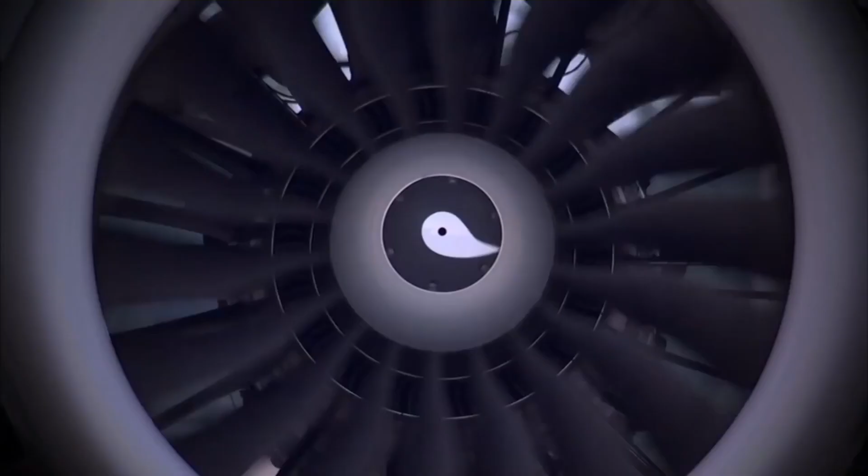Aircraft of today are quieter, more efficient and stronger than anyone could have imagined, even a few short years ago. Of course, future aircraft will continue this trend and become even more efficient and dependable, reaching unimaginable goals that today's aircraft could never reach.

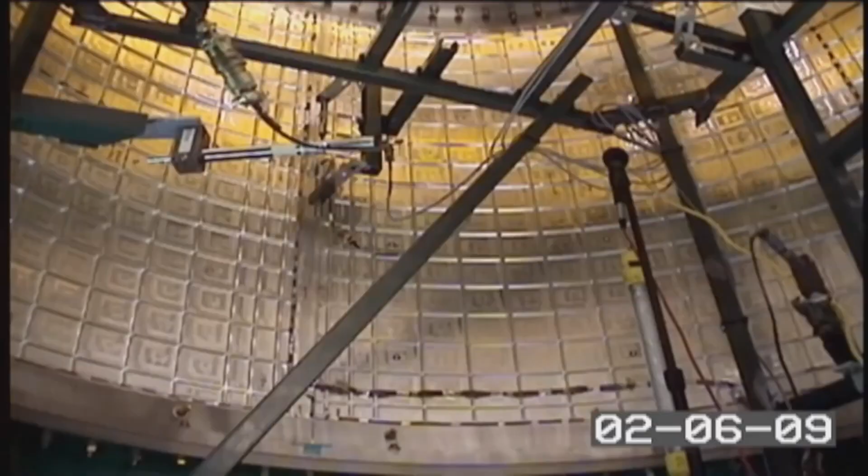But how will they reach these goals, and who is performing the important work to change the way we all fly? The common misconception is that most advances come strictly from major aircraft manufacturers. But the true story is much more complex. Unknown to most of the public is that one of the unsung leaders in aviation is NASA. NASA engineers work hand in hand with industry partners, developing and testing new designs to make aircraft safer, greener,

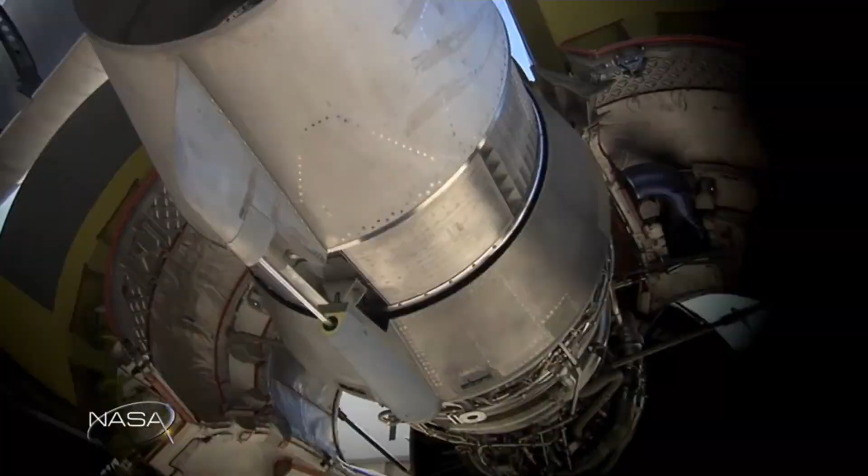and much more efficient. On this episode of NASA X, we will look at how this collaboration works, and we'll see how NASA and industry are paving the way for greener, safer aircraft for today and for aircraft of the future as well.

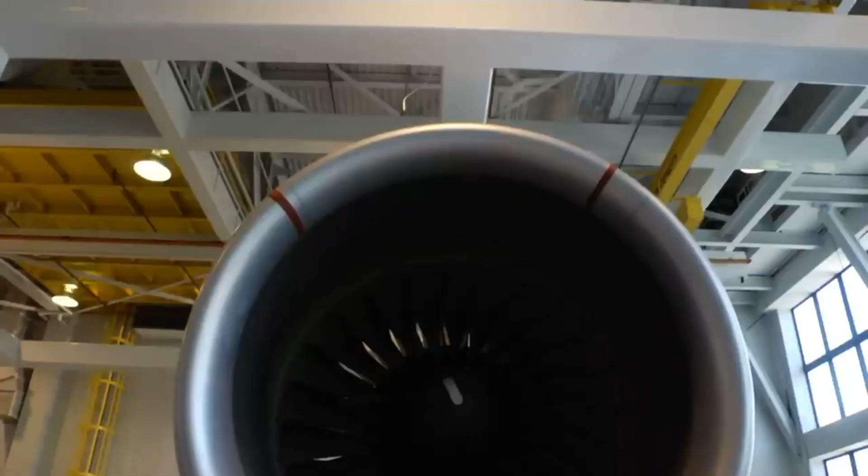This is a familiar sight for modern travellers. Large metal jets roaring down the runway and lifting into the air. In fact, this sight really hasn't changed that much in the last 50 years or so. Other than the way most people dressed for flights back then, the basic concept of air travel is pretty much the same. There have, of course, been measurable differences in fuel economy, with new developments in engine design and noise reduction techniques. But the basic tube and wing shape and the material used to build these aircraft has remained pretty much the same for years.

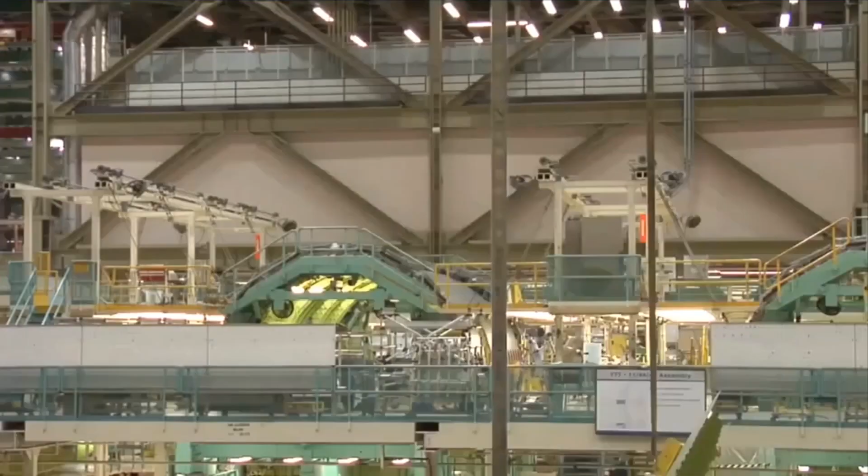But that isn't the case anymore. Like so many products that have evolved dramatically in the last few decades, like phones for example, the same is true for aircraft design. Today more than ever, researchers are pushing the boundaries of the science of flight in their effort to make aircraft of the future more efficient, quieter and greener.

So who's taking the lead and why? Obviously industry is taking the lead in some areas, because cleaner operations and more efficiency mean higher profits. But they're just not the only players. One of the leading innovators in aeronautics over the history of flight has been and continues to be NASA.

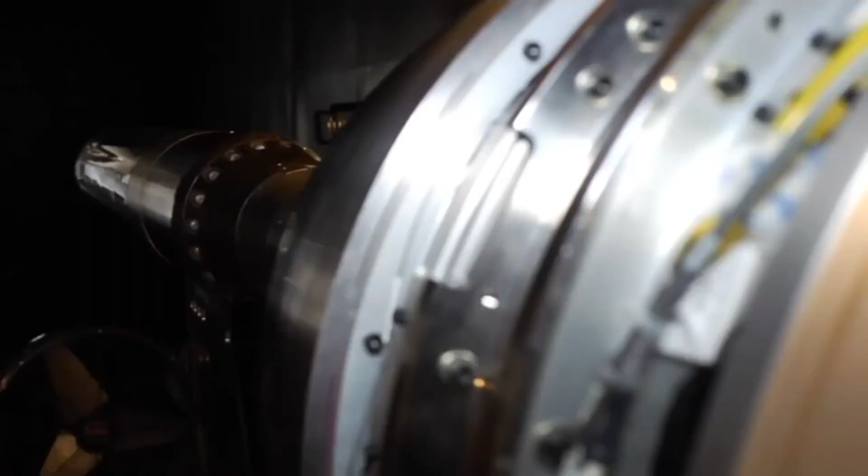The push to modernise and change aircraft of the future is being led by NASA's Environmentally Responsible Aviation Project, or ERA. The ERA project is putting its money where its mouth is with tough but reachable goals to make big changes in how we fly by the year 2025.

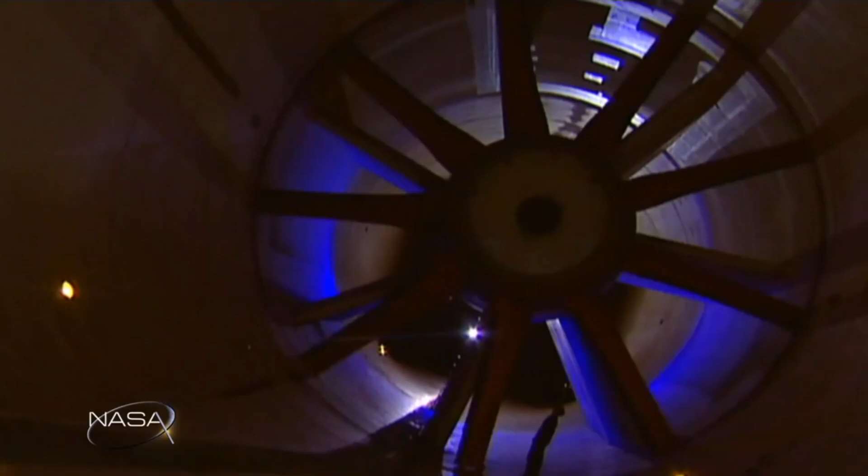So the Environmentally Responsible Aviation Project is a 5-year, 6-year project, and it's focused on advanced aircraft design and the technologies that are needed to enable them. The main goal of the project is to reduce noise, to reduce mission fuel burn, and to reduce LTO NOx emissions. And LTO stands for landing takeoff oxides of nitrogen emissions.

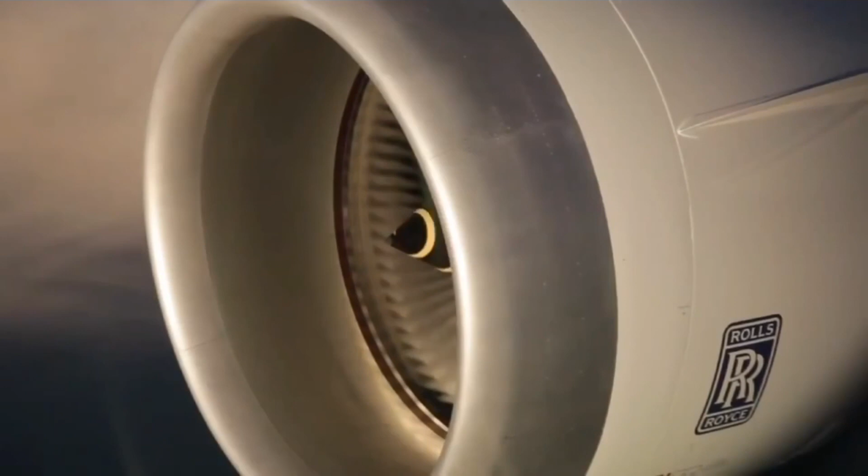And we want to do that simultaneously, and that's never been done before, where we looked at some very difficult metrics and tried to push all of those metrics down simultaneously. And so over this 5 or 6 years, we'll be looking at technologies, we'll be looking at aircraft designs and the combination of those to end up with a configuration that could simultaneously attack these goals.

So how do you make these goals a reality? The 4 basic principles of flight are lift, drag, weight and thrust. Finding efficiency in each of these basic principles will help reach NASA's stated goals. Let's look at weight first. Obviously, if you can reduce the weight of an aircraft, then you will burn less fuel and therefore become more efficient. Airlines are always looking for ways to carry less weight.

You can see that in extra baggage fees, reduction of heavy items such as ovens and heavy carts on some planes, and in one of the most drastic measures taken in recent years, some airlines have begun asking passengers to use the bathroom in the terminal before getting on the plane, making the passengers a little lighter.

In a 1-month experiment, an airline found that they reduced greenhouse gas by 5 tons simply by asking passengers to use the loo ahead of time. This proves that even small changes in the weight of an aircraft can add up to big long-term benefits. The holy grail, of course, is to make the entire aircraft structure lighter.

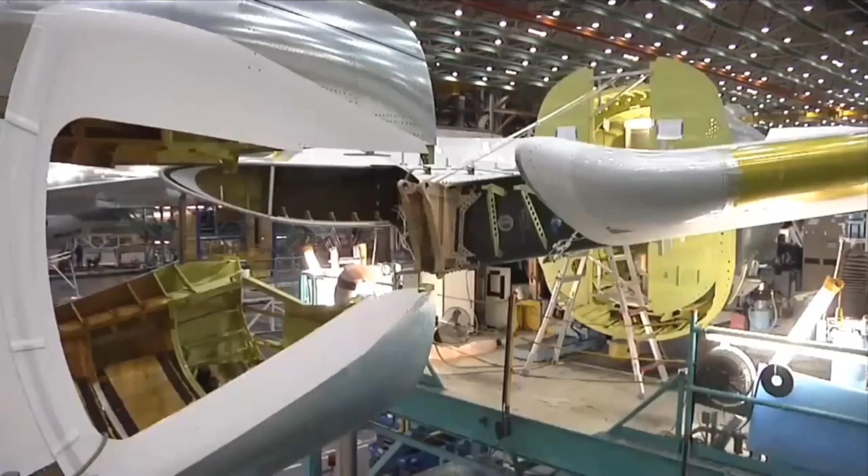So how can this be done? Today's aircraft are made out of metals that are safe, but that are also very heavy. So is there an alternative? In recent decades, NASA and its industry partners have been working hard developing new materials that could bring aircraft out of the 20th century and into the future.

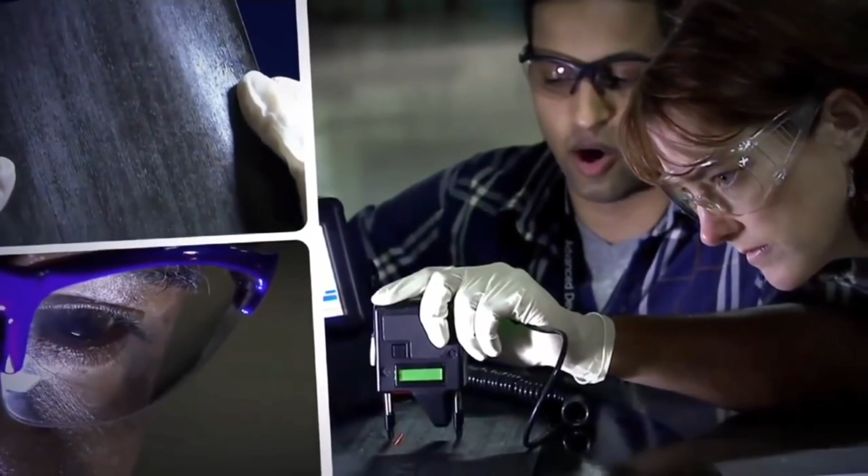New composite materials are leading the charge to replace conventional metals. Aircraft designers are taking advantage of composite materials' lightweight, strength, and flexibility. Aircraft designers have long known about these qualities and have been using something called carbon epoxy composite materials in small quantities for decades.

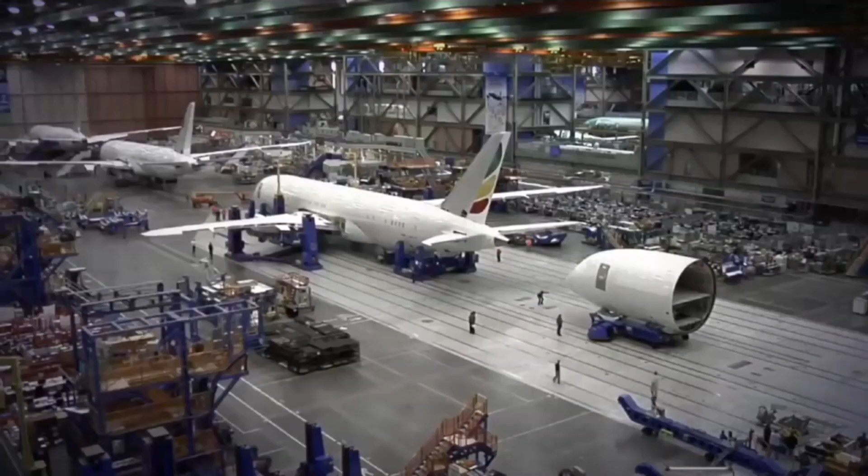After years of research and validation of composites for flight, the Boeing company was the first to step up and build an aircraft almost completely out of composite materials. Called the 787, this next-generation aircraft first came into service in October of 2011. As the first official commercial flight of the 787 took off from Tokyo that year, it was clear that this concept of an all-composite aircraft was here to stay.

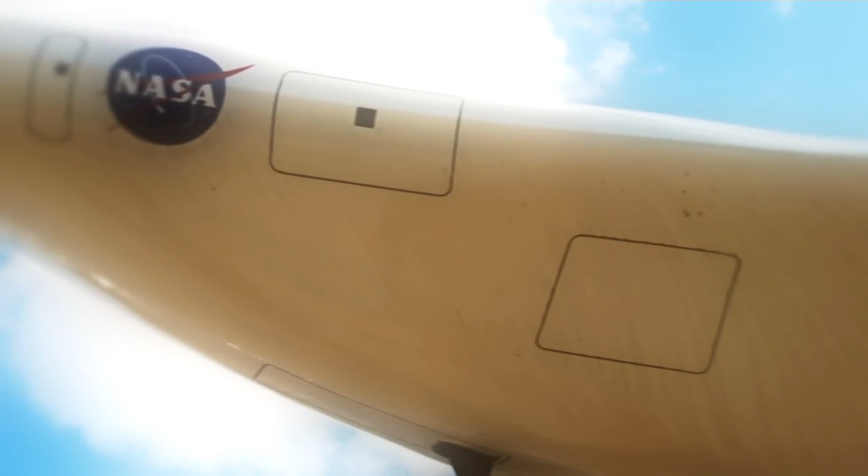NASA is not in the business of building aircraft, but they are in the business of helping lead development programs to move the science of flight along. Once validation and testing in the development process is complete, NASA shares its findings with industry in an attempt to help further research and development.

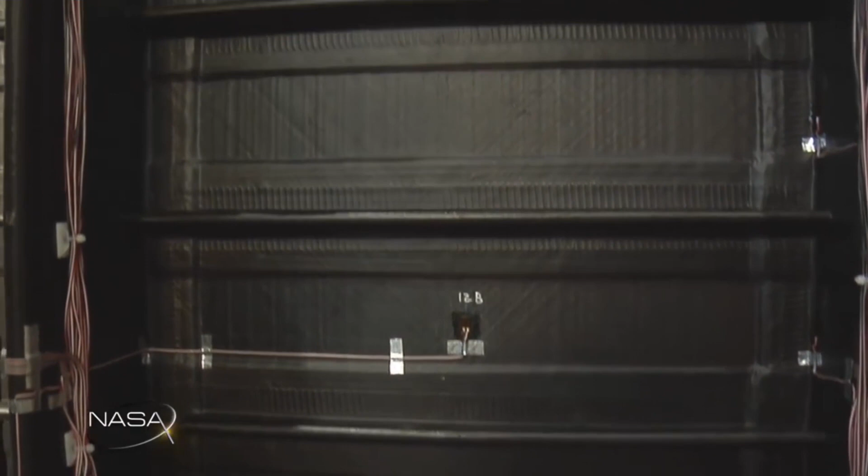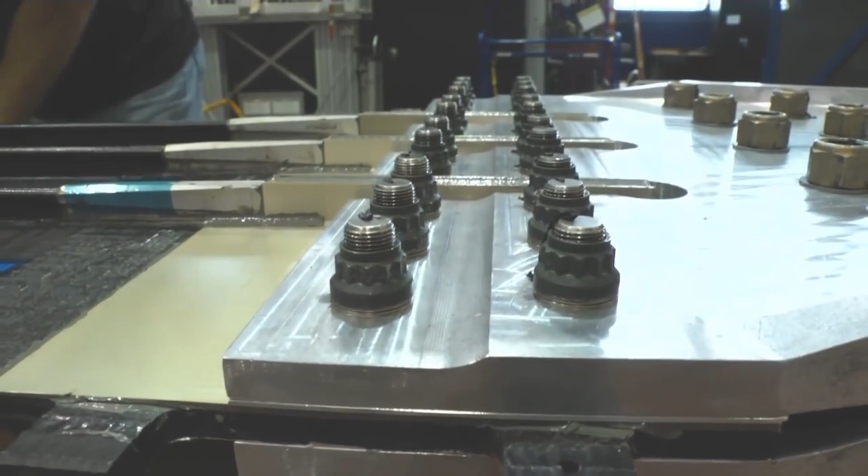One of the programs in which NASA is working with industry is in the development of new composite materials for aircraft. Here, in the Structures and Materials Lab in Building 1148 at NASA Langley Research Center, much of the development of next-generation composites for use in aircraft is taking shape. Called PRSEUS, this new idea has the potential to completely rewrite how composites for use in aircraft are made.

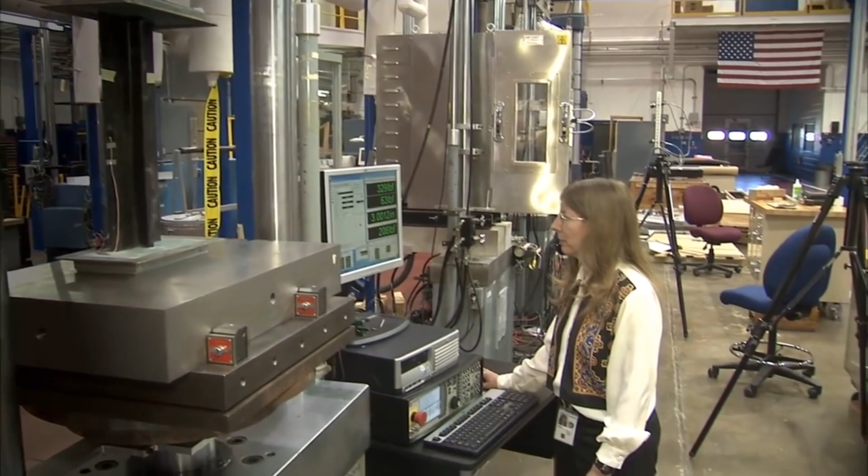Leading much of the research for NASA's Environmentally Responsible Aviation program in the composite field is NASA Langley's Dawn Jegley. This MIT grad has been working with these materials for decades and has a keen understanding of what needs to be done to make these composites of the future fly.

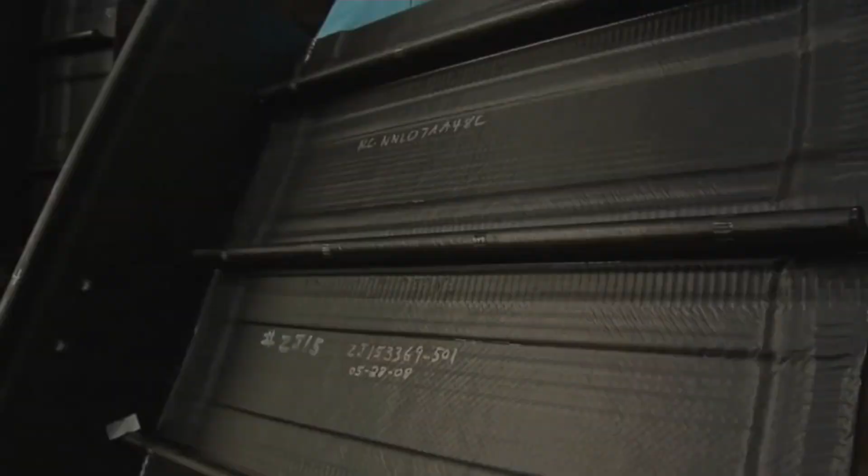PRSEUS stands for Pultruded Rod Stitched Efficient Unitized Structure. And what that means is that we have a graphite epoxy or a carbon epoxy structure, and what we have is pultruded rods inside carbon layers. We have a carbon skin, and we have stitches that run through the thickness that hold the whole thing together. One of the huge benefits associated with PRSEUS is its revolutionary stitching technique.

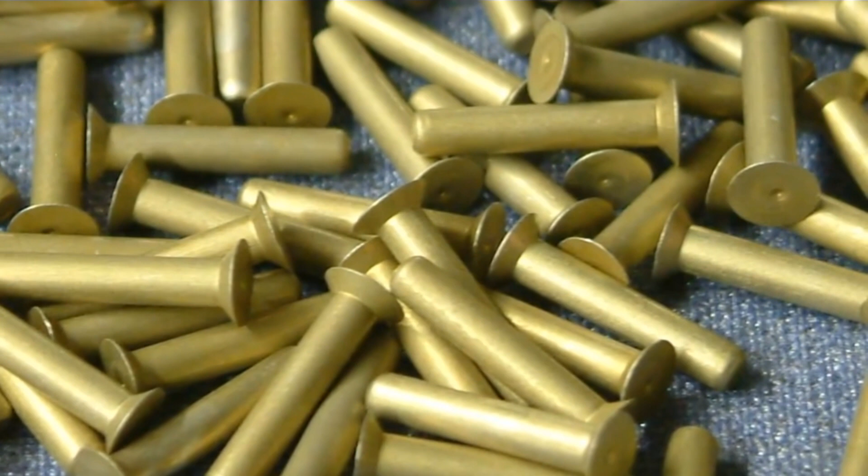On current metal and composite aircraft, one of the key components used to hold the vehicle together are the fasteners, like rivets or bolts. Although these are effective, one major drawback is that quite a few holes have to be drilled into each piece where the fasteners will be added. Not only is that labour intensive, but each hole represents a place where damage or a crack could start. But the stitching prevents that from happening.

We found that if you have a crack and it grows to a certain point and it gets to someplace that it's stitched, that crack will turn. So instead of going through the stitching, it will turn, and that's a good thing because in flight you would rather not have a crack grow all the way around a wing.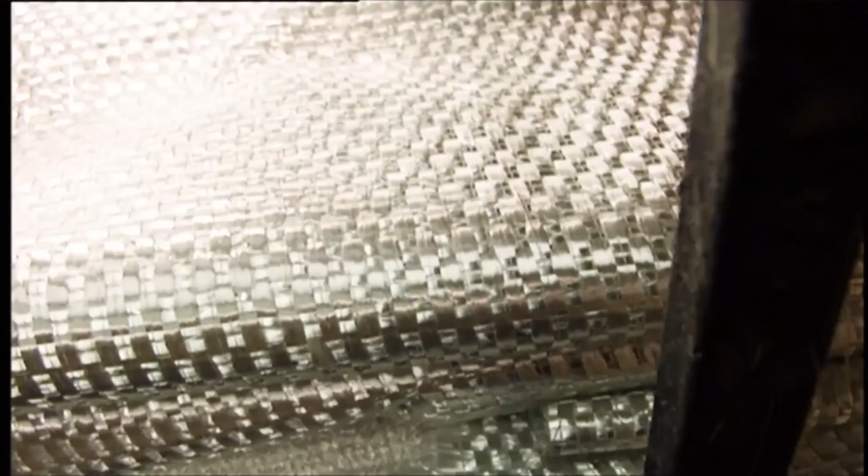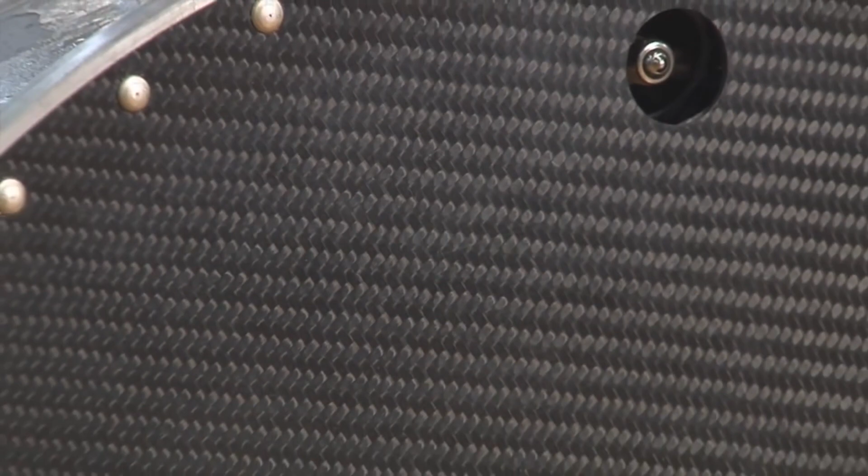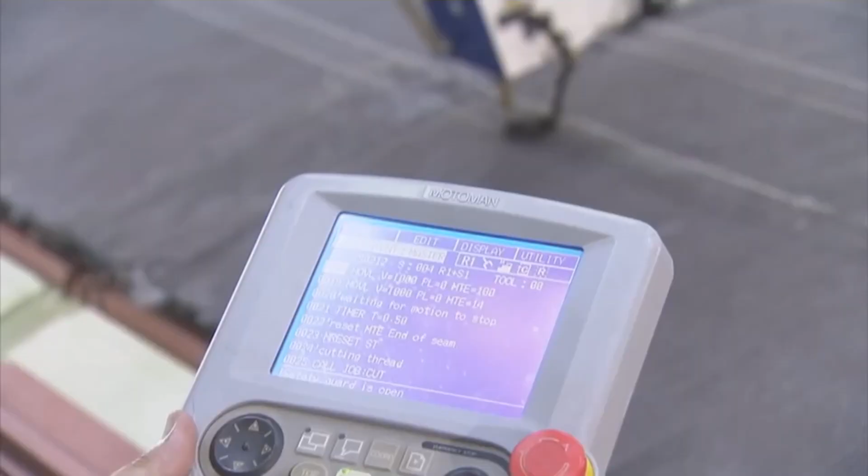When you look at a piece of carbon epoxy composite material, it honestly doesn't look very strong in its raw form. But once it is in its final state, it can be much stronger than metals. You start out with a fabric. It looks kind of like carpeting. And you roll that out into the shape that you're looking for, and you position all the different parts of your structure where you want them, and then you come through with a stitching machine.

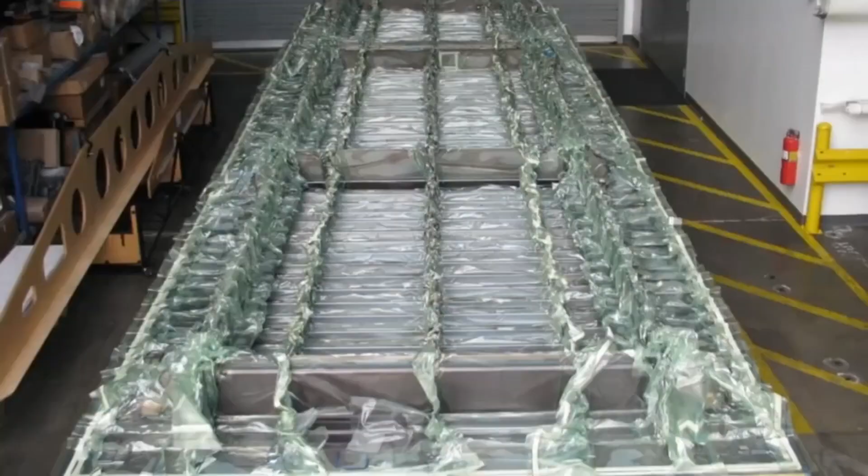After you've stitched the whole thing together, the panel goes into an oven. It's infused with epoxy. We heat it up, and then we get everything just the way we want it, and then we cool the structure. So what happens is you end up with a piece of material, could be a very large piece of material, which is now stiff and strong and just in the right shape that you want it.

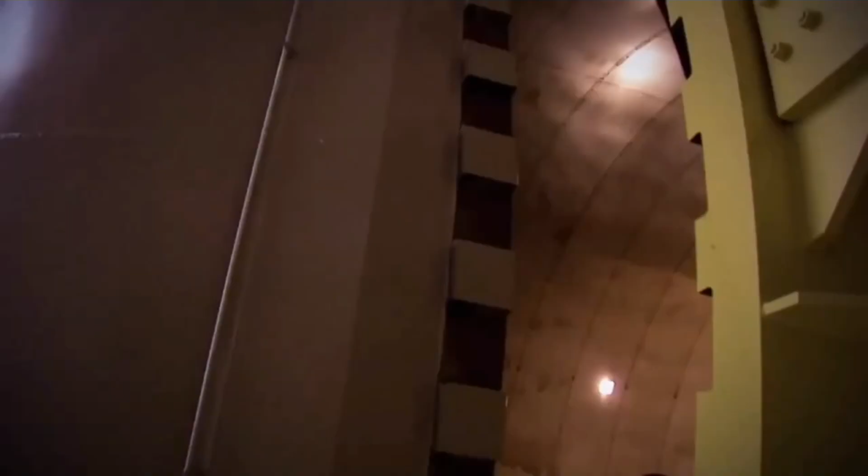Another key component to carbon epoxy composite materials is that they can be tailored to be much stronger than metal. At the molecular level, the properties of metal are isotropic, which means that the properties all run in the same direction. Because of this feature, aircraft designs are very bulky in some areas to provide stiffness, making a craft much heavier. But with composites, you are starting with fibers which are very strong, tough threads, and you can position those threads in any direction you want.

For example, if there is an area on the aircraft that takes a lot of load, the designers can place the fibers in that direction, providing enormous strength, but while also using much less material and weight than metal aircraft.

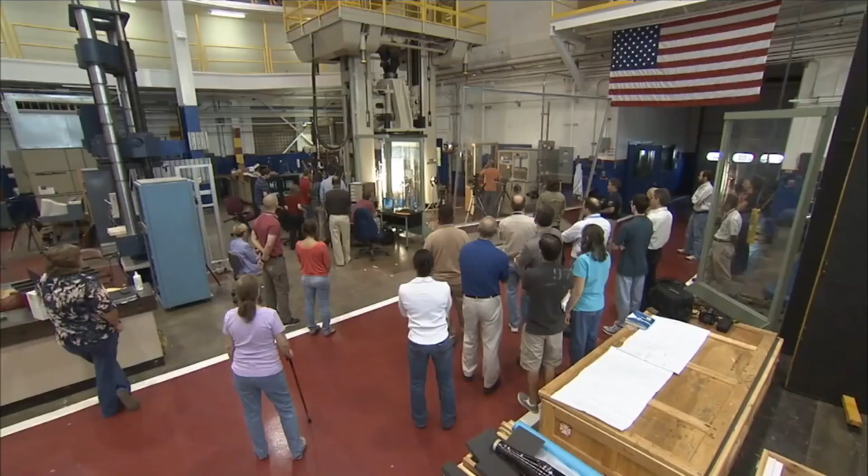Of course, validating that the pieces will work is a major component of the development stage. So I know that NASA really does some great testing of its materials before they go onto any aircraft. How are you testing PRSEUS at the moment?

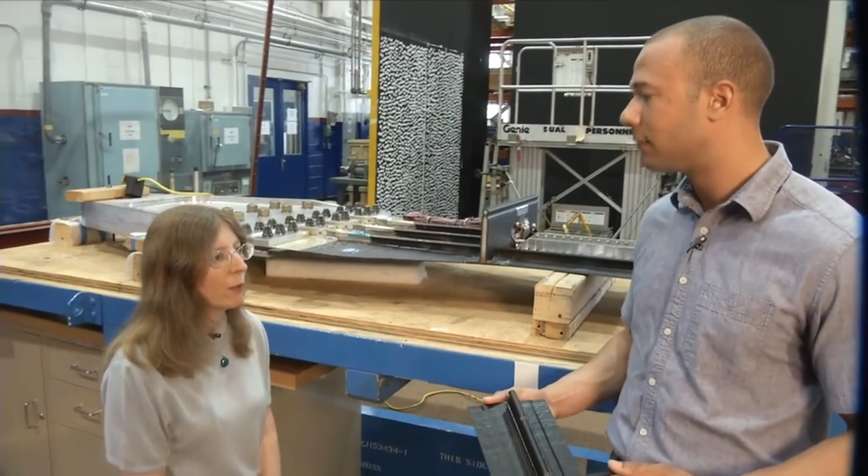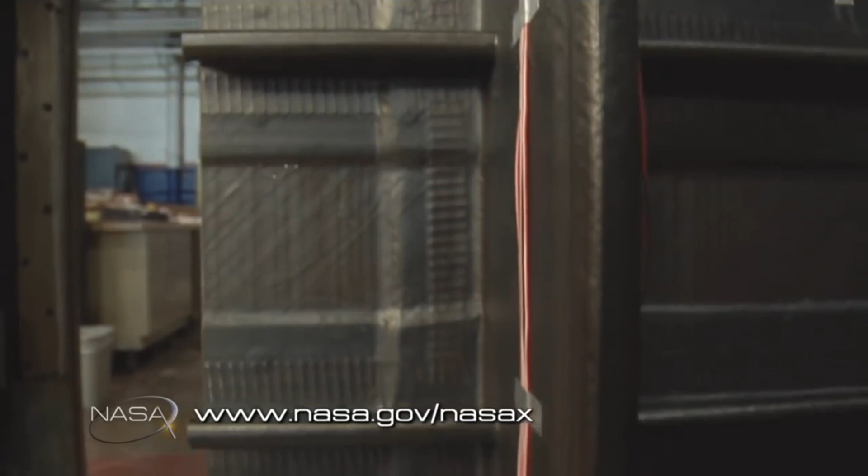One of NASA's goals is to develop technology for future aircraft. When we're developing a new structure, one of the things we need to do is fully understand how it's going to behave. And to do that, we start by looking at very small pieces, and then we move up slowly to very large pieces until we get to a full-scale part of an aircraft.

And then when we understand that, we go to the next stage, which might be something more like this, where we have what we call a built-up structure. So we have a skin, and then we have a stiffener on it. And then we can apply a load. We might push on it, we might pull on it, we might bend it to look at how that behaves.

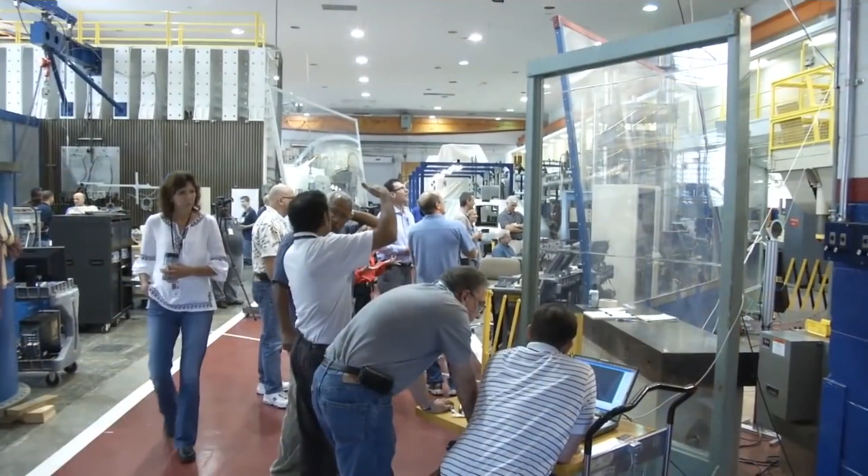And all the while we're doing this, we're doing analytical studies to make sure we understand and can predict how it's going to behave. Because if we don't predict it properly, then we feel we don't really understand it well enough, and we have to take a step back and figure out what it is we're missing. We have many facilities around the center here that we use for doing those kind of tests.

Well, Dawn, thanks so much for talking to us today about Perseus. This looks like an amazing technology, and you're doing a fantastic job. Thank you so much. Thank you.

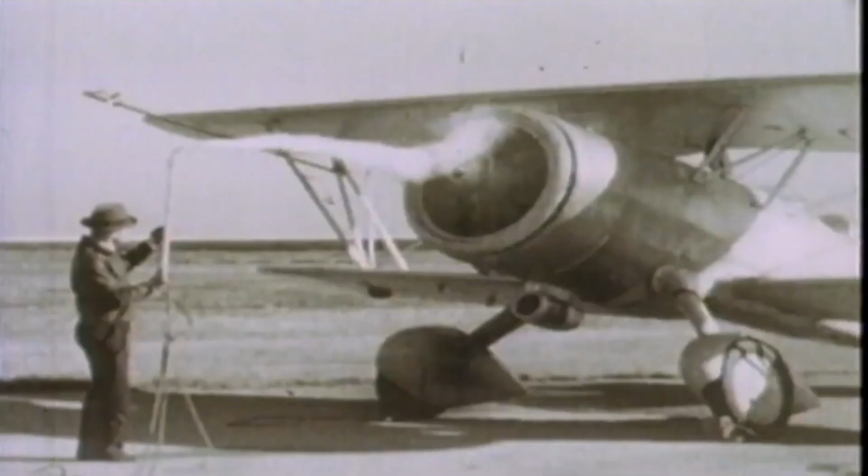Up next, let's look at another of the basic principles of flight: thrust. Since the earliest days of flight, engineers have looked for ways to make the engines we use on aircraft more powerful and efficient. One of the most important early engines was the 1903 Wright brothers design that was used for their very first flight at Kitty Hawk. It only produced about 12 horsepower, but it opened the door for all aircraft engines to come.

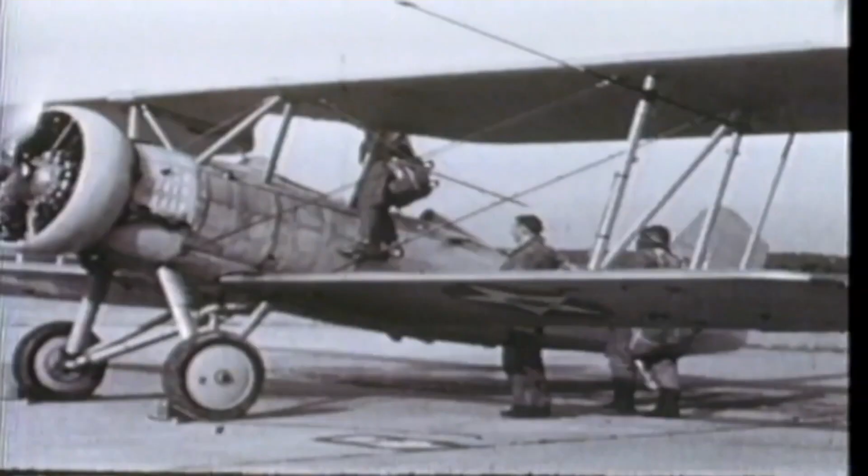Since that time, there has been a steady progression in the development of engine technology, from the relatively simple propellers of the past to the incredibly advanced jet propulsors of today. Engines have never been better, but although current engines are already very efficient, quiet and relatively green, they pale in comparison to what the next generation of engine technology will be.

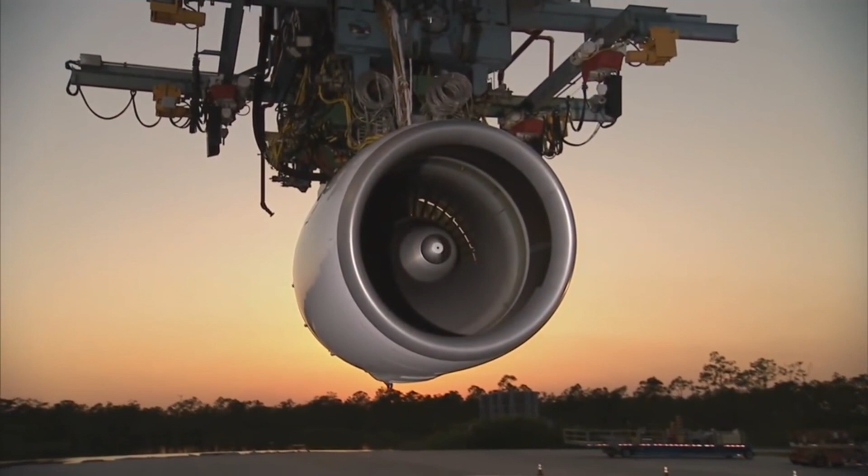To help understand how engine technology is improving, let's first take a look at how a basic turbofan engine works. Incoming air is captured in the engine inlets. Some of the air passes through the fan and into the compressor and burner, where it is mixed with fuel for combustion. The hot exhaust passes through the core and fan turbines and then out of the nozzle. The rest of the incoming air passes through the fan and bypasses or goes around the engine. So a turbofan gets some of its thrust from the core and some of its thrust from the fan.

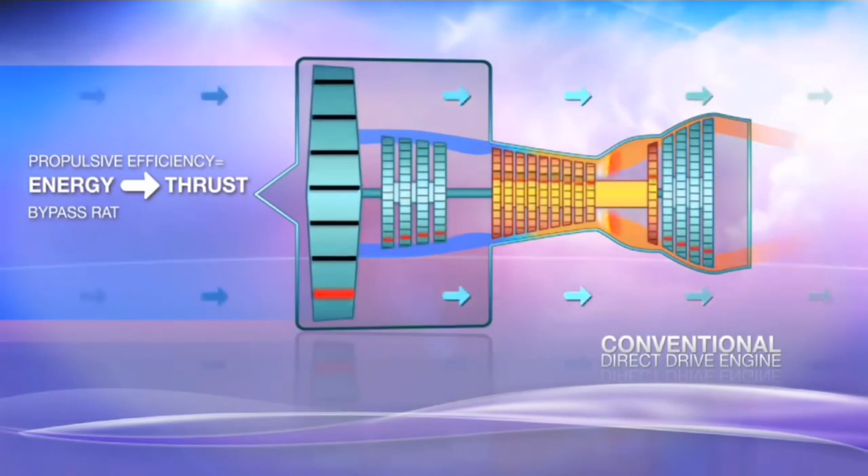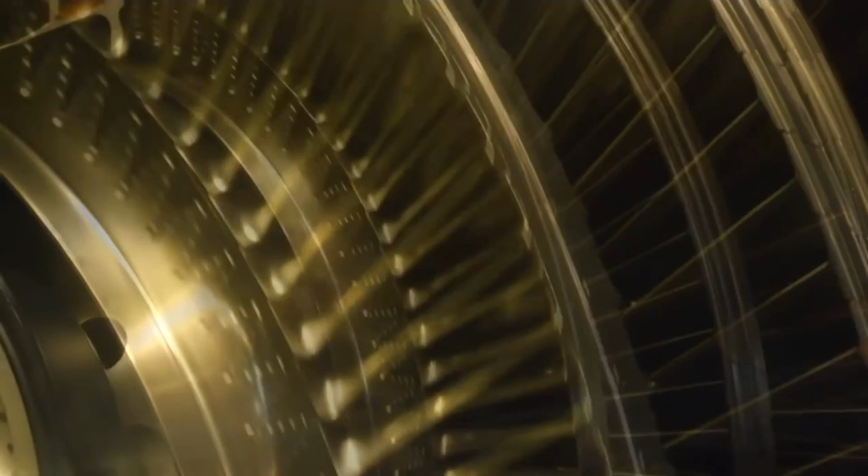The ratio of the air that goes around the engine to the air that goes through the core is called the bypass ratio. Many engines today have a bypass ratio of roughly around 5:1. Engineers have known for many years that if they could increase the bypass ratio, then the engine would become much more efficient. But the trouble with increasing the bypass means that the size of the engine would have to grow, making it heavier and also unable to fit under the wings of most planes.

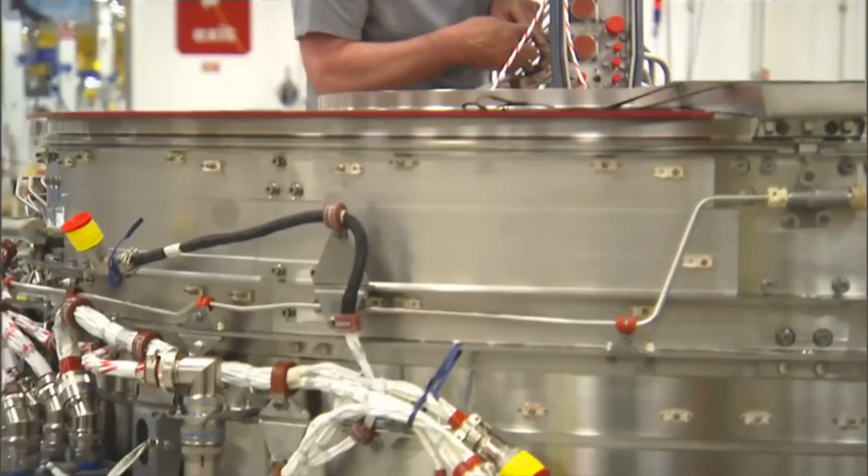So, what to do? Over the past 20 years or so, NASA and industry have been working on a solution that would create ultra-high bypass engines while also addressing the stated problems of size and weight.

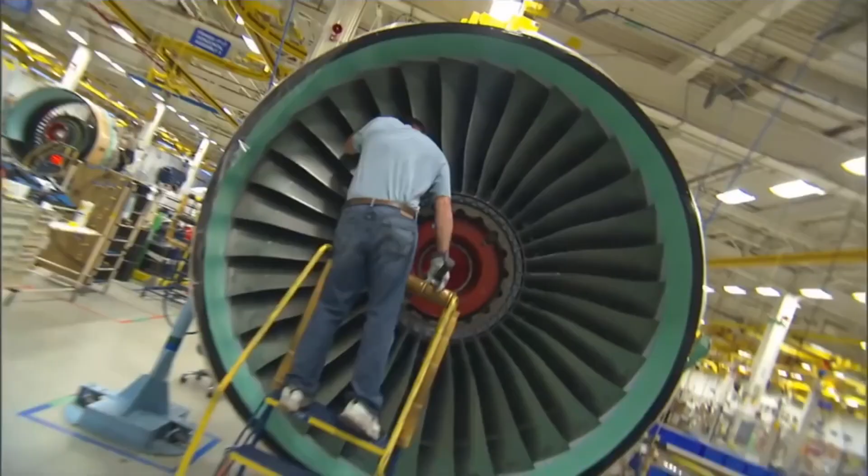Today, a new engine designed in collaboration with Pratt & Whitney and NASA has been developed that will more than double the bypass of current engines. This new engine design has taken many years of research and development just to get to the point where we are today, because three key pieces of technology needed to be created that didn't exist: a new gearing system, an ultra-efficient fan, and a more efficient nacelle.

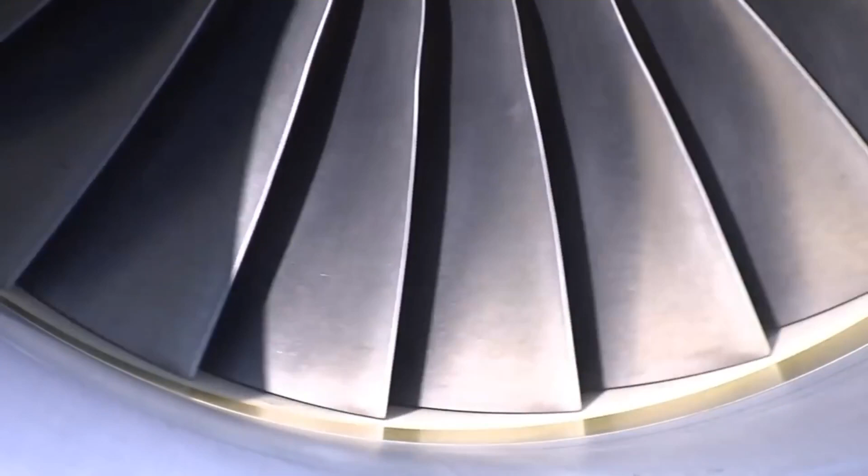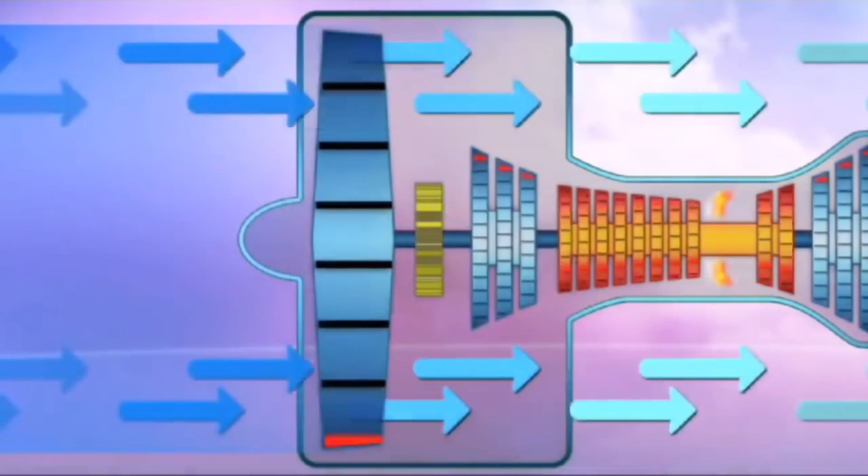Although each of these were difficult to perfect, one of the most challenging was the gearing system for the turbofan. This is because there is a paradox in engine design. The slower the big fan at the front moves, the more efficient it is, but the turbines at the back have to move at a very high rate of speed to work efficiently. Hence the paradox. In order to have the slow-moving fan at the front and the fast-moving fans at the back working together, a revolutionary gear system had to be developed that could allow both of these parts to work together optimally.

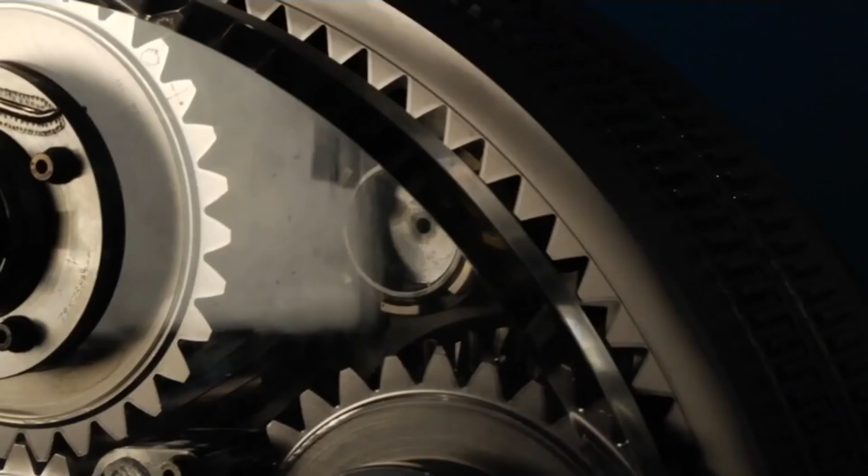So what the gear lets me do is shrink the core engine that makes the power to a large degree. It makes it lighter, takes a couple of thousand parts out, and it means I can replace some very rare super alloys with some more common gear steel. We always knew you could do that, but you need a gear that's way over 99% efficient. We're talking about 25,000, 30,000 horsepower gears.

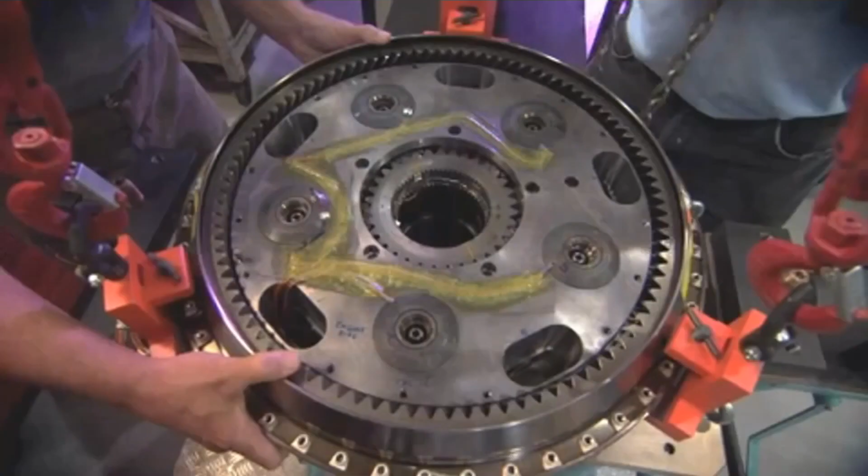A naval ship has that sort of power, and the gear is the size of a small house. We had to develop a gear that's the size of a small automobile wheel, not a house, and it has to last 20 years without maintenance, and it has to be super efficient. And so we've been working on this for at least 20 years.

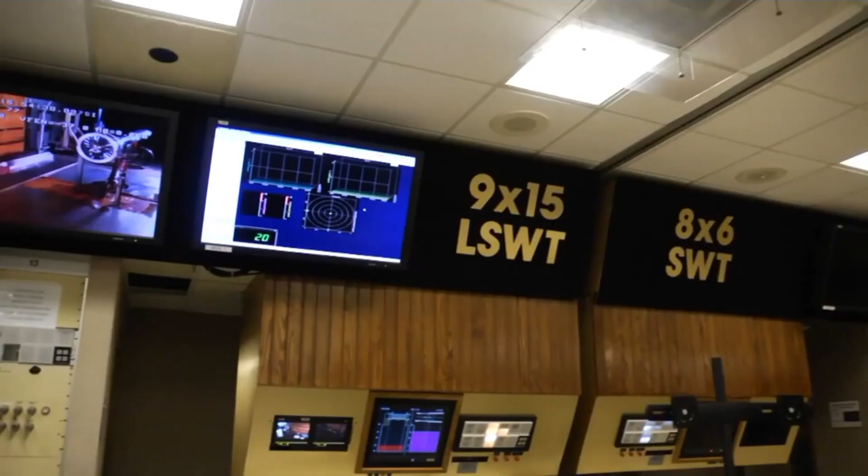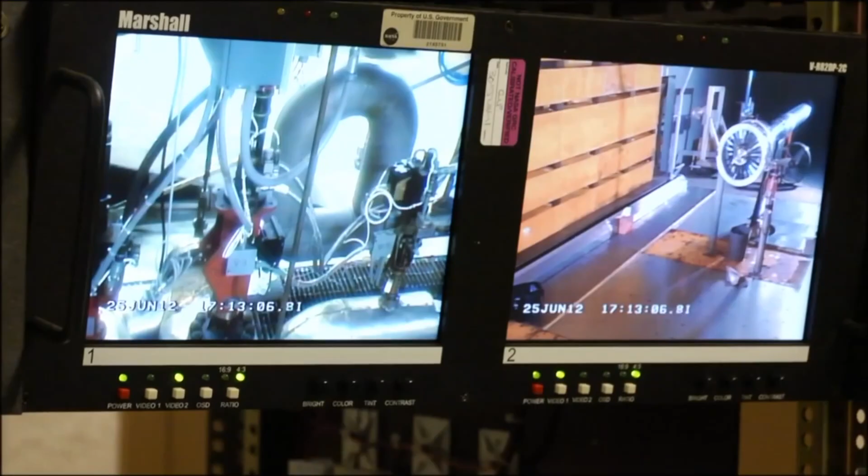Much of the testing for this engine has in fact come at NASA laboratories. NASA's unique facilities and subject matter experts have helped the Pratt & Whitney team to understand how to configure the ultra-high bypass engine. So this is an example of the ultra-high bypass engine from Pratt & Whitney called the geared turbofan. This particular engine has a bypass ratio of up to 15:1, which means 15 times the amount of air goes through this part of it than goes through this part.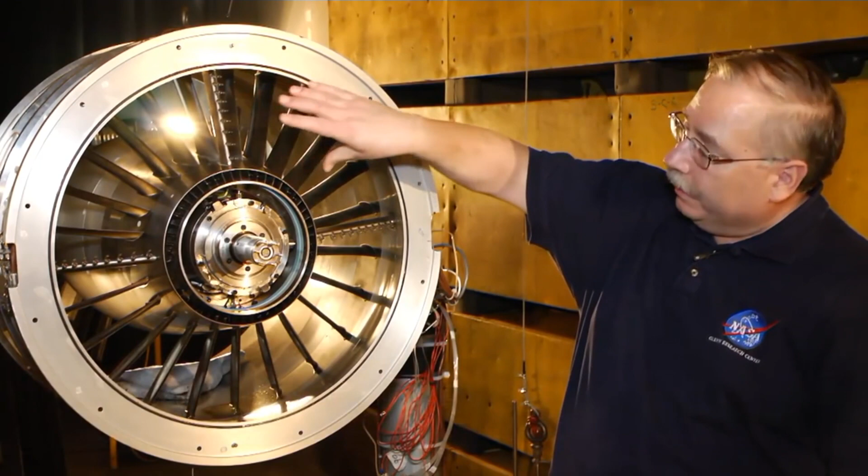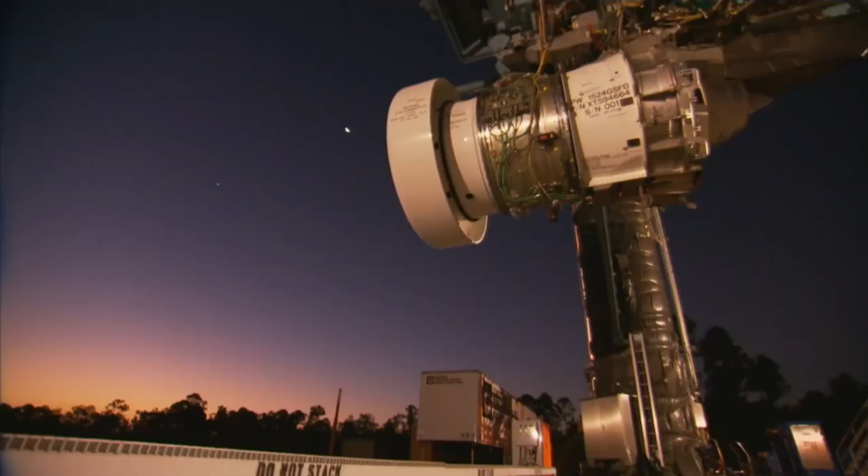And the reason they can do that is because the more air that you can put up here, the more efficient the engine is and the better the fuel economy. Because fuel costs have spiraled out of control in recent years, the fuel efficiency of this engine could be a game changer for the aircraft industry. The people who care are not so much Airbus, but their customers, the airlines.

So an A320 with these engines on compared to the current engines will save $200 to $400 an hour, on the order of $1.5 million to $2.5 million a year reduced fuel costs, depending upon the cost of fuel, typically. So it's worth millions per year for the airline. That doesn't mean they still won't charge you for the extra bag, though.

Of course, fuel economy is not the only huge benefit to this engine. Its noise reduction capability is truly astounding. On a typical jet aircraft, the fans at the front are moving at more than the speed of sound, making them very noisy. But because this new engine's forward fans move slower, they now make much, much less noise. They are really quiet. And how quiet is really quiet?

For a 737-sized airplane, 150 passenger airplane, the objectionable noise on the ground, the area that hears objectionable noise, is reduced by about 3/4. Almost to the NASA goal, which is to keep it in the airport.

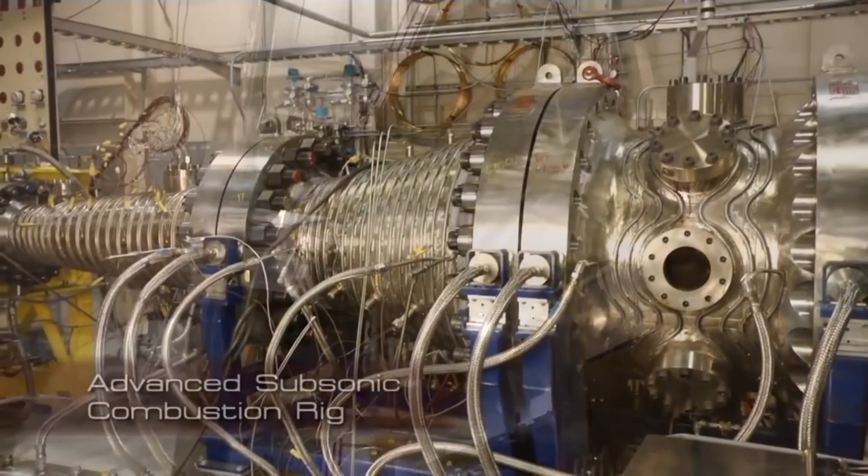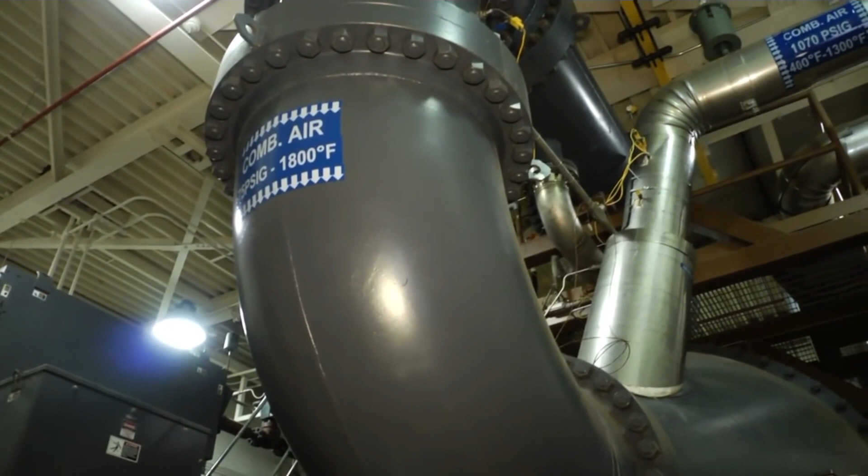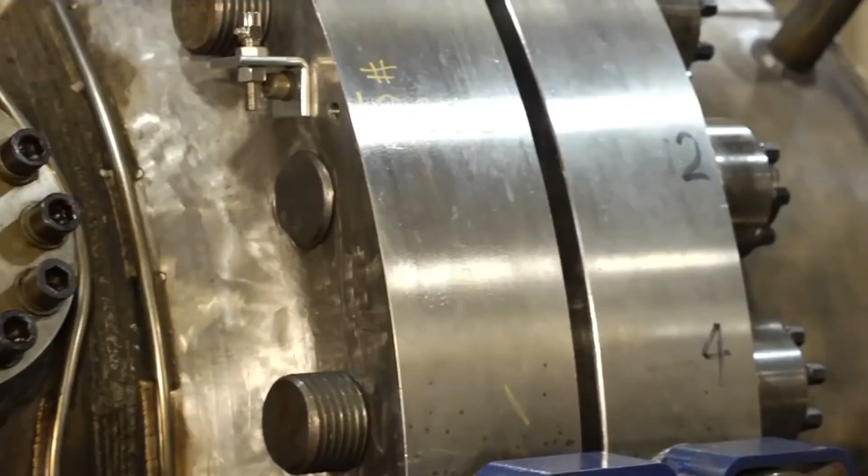Another key component in the testing chain of the entire engine happens here at NASA Glenn, in the Advanced Subsonic Combustion Rig, or ASCR. This facility is the only one in the country that allows real-time, real-world testing conditions for engine combustors. This is the Advanced Subsonic Combustor Rig. It's really one of the unique facilities in the U.S. which enables us to test combustors and gas turbine engines at realistic conditions that they would see in a gas turbine engine flying in today's aircraft and even those in the next 20 years from now.

The real beauty of this rig is that it allows us to operate pretty much over the whole flight regime. So we can map out what the emissions are near the ground during idle and takeoff conditions, but also on approach and landing, in addition then even at cruise, because we're also becoming more and more concerned about emissions in the atmosphere and what that does to our environment.

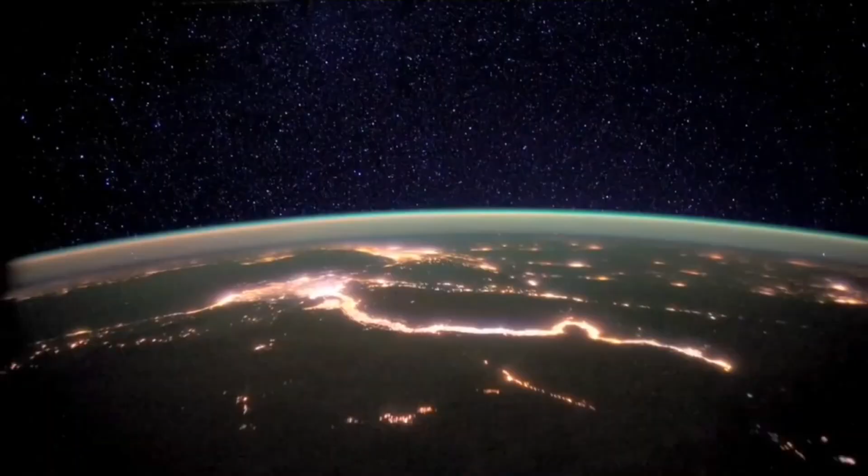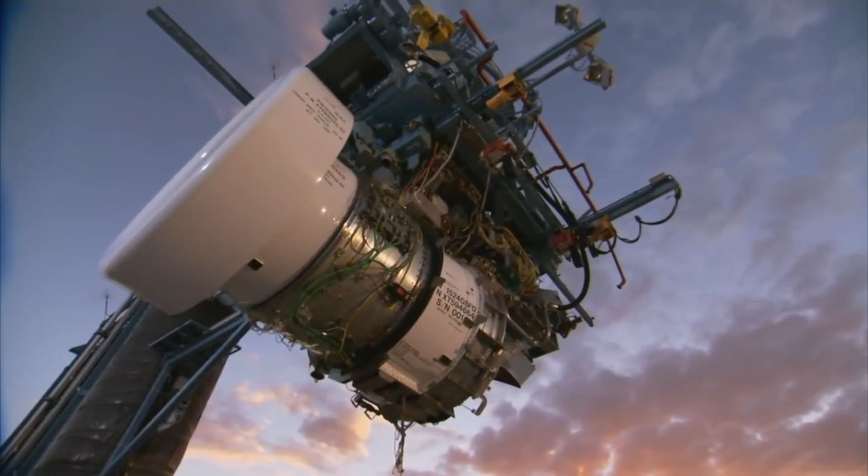The environment is one of the key components in much of the work going on now. NASA and industry realize that good stewardship is not only beneficial to the planet, but can be a good business model too. The work that is coming out of this program is looking at both fuel-flexible applications as well as strictly environmental concerns. Our geared turbofan is 15% more efficient and can run on a wide range of fuels. In fact, we're some of the leaders working with the industry in the development of biofuels.

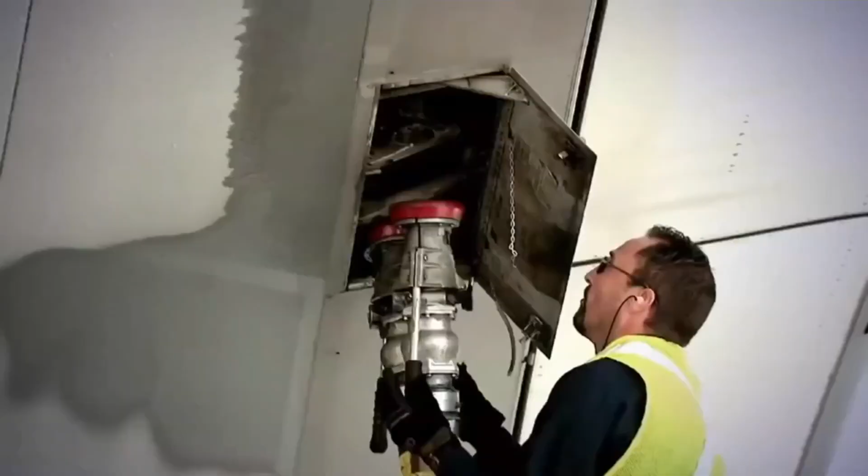Of course, testing for these new engines is not only happening at NASA, but can also be seen on a unique airplane owned by Pratt & Whitney. Pratt & Whitney actually owns 2 747 airplanes that we do testing on. There are 4 engines on a 747. We'll actually take one of the existing JT9Ds off, which is a Pratt & Whitney made engine that powers 747s, and we'll actually in some cases replace that engine with one of our test engines. So we'll run the airplane on 4 engines, 3 of which are currently certified on the airplane, the 4th being the experimental.

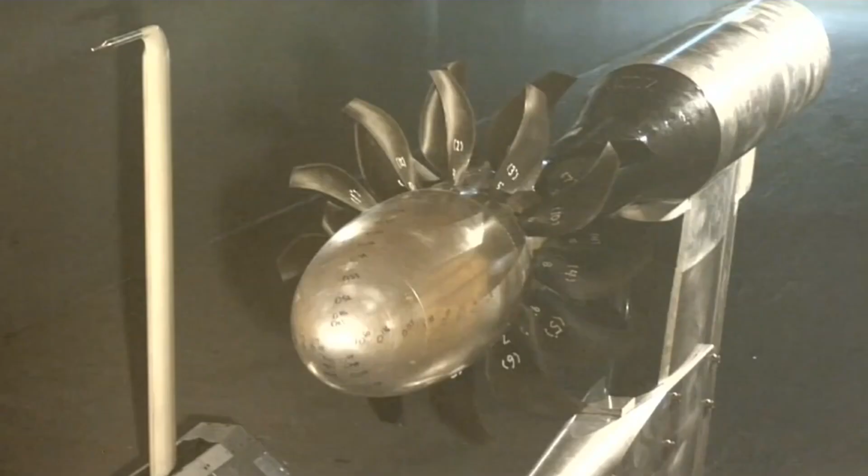Of course, this new geared turbofan is not the only game in town. NASA has also taken a look back at some older technology, including a concept called the open rotor that also shows much promise. So here at NASA, we're working on the next generation of engine technologies, both ducted engines like the geared turbofan and unducted engines like open rotors. So we recently finished a series of tests with General Electric and the Federal Aviation Administration on open rotors, looking at these technologies to reduce fuel burn and improve the acoustic performance of these next generation engines.

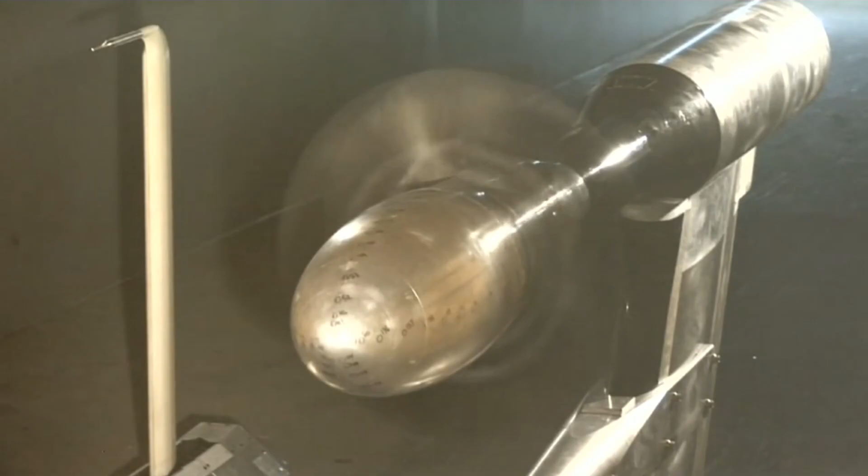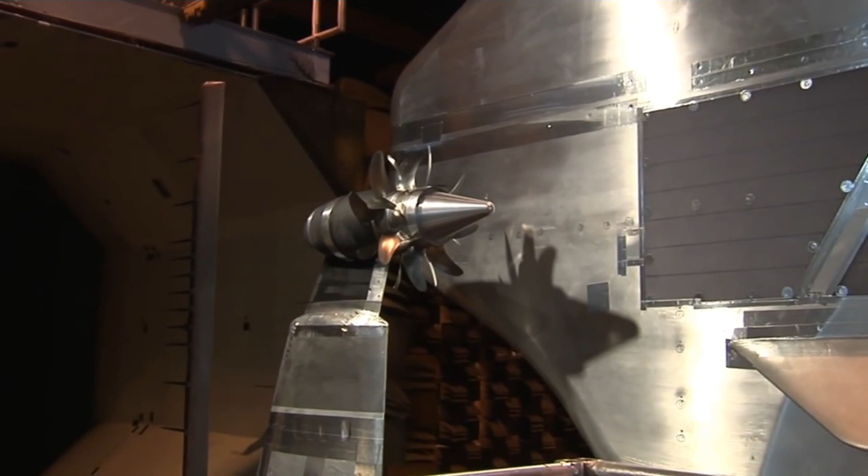So as you try to go to higher and higher bypass ratio engines, the fans keep getting larger and larger diameter, and at some point it just makes sense to get rid of the cowling and go with just what essentially looks like a propeller. The difference is that these are very specialized high-speed propellers, so that an open rotor powered aircraft would be able to fly at essentially the same speed as an aircraft with a jet engine.

In the past, the open rotor concept had been promising, but the major drawback was the noise. Thanks to the advent of modern computational fluid dynamics, NASA and industry engineers have been able to redesign the blades for these open rotors and make them much, much quieter. The system studies that NASA's done has shown that for single-aisle aircraft, if we built an open rotor engine today and put it on an aircraft, it would probably be quieter than most of the aircraft that are flying out there right now. So we've come a long, long way in being able to solve the acoustics issues that were part of the original unducted rotor program.

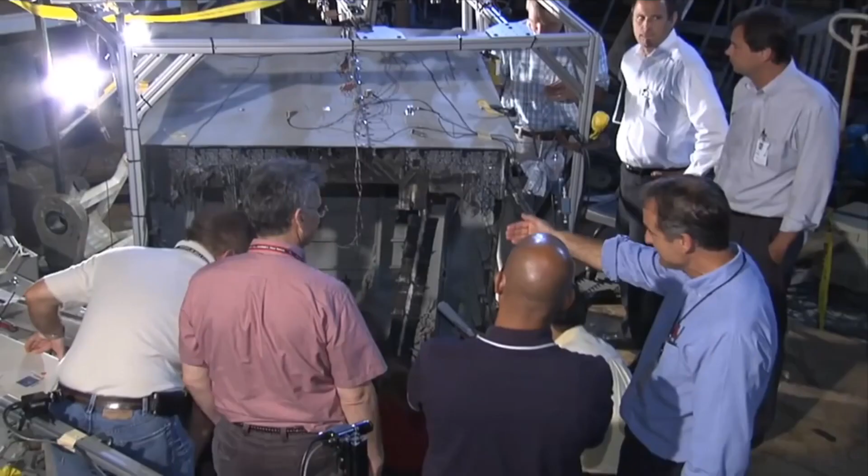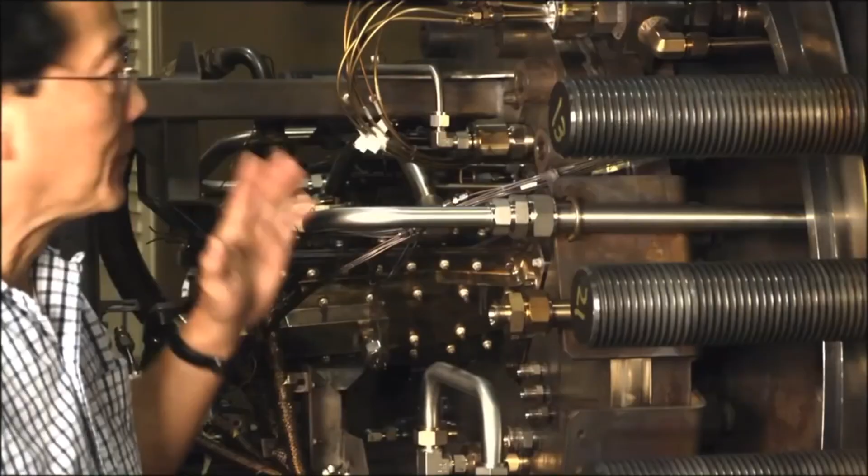So, there you have it. NASA's ERA program and industry are truly changing the way we all fly. NASA is pushing the industry hard to make these changes see the light of day, and industry is responding with truly innovative and groundbreaking technologies. With this type of collaboration and work ethic, there's no doubt the world will soon see a dramatic difference in the way we all fly.